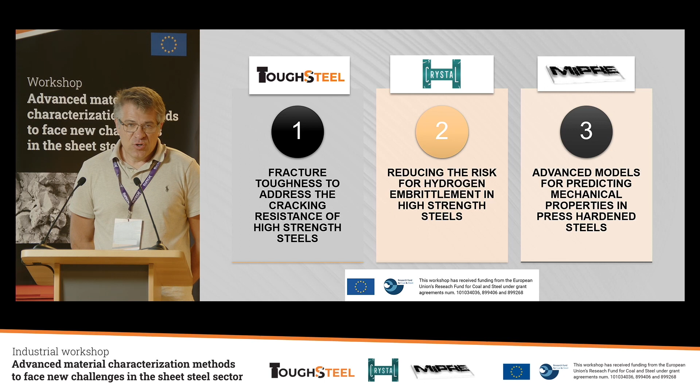Okay, these projects mainly address the mechanical performance of high-strength steels, because high-strength steels are the main materials applied in lightweight construction of vehicles currently, and it could be in the future. We see that high-strength steels are the perfect choice for lightweight because they combine outstanding properties with high levels of sustainability and affordability. And sustainability is a topic that we are all interested in today.

Just to mention that the CO2 footprint in steel production is one of the lowest in the materials for lightweight, and also steel has a lot of possibilities in recycling. So we're going to see in the coming years projects and results about development of newer steels with a higher degree of recycled material and of course lower impact in the footprint.

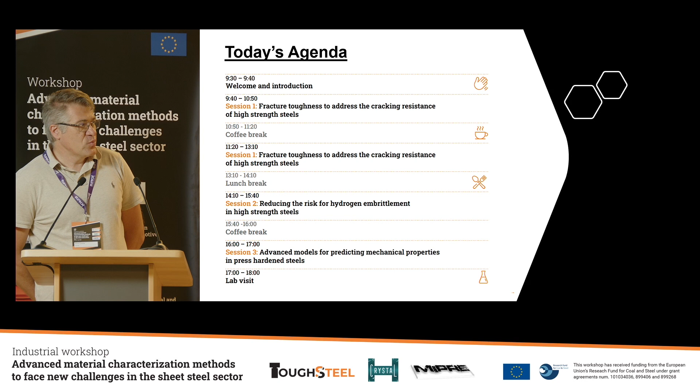So what we're going to see today, this is the agenda. We will start in the morning session with fracture toughness to address the cracking resistance of high-strength steel. This is the result of the ToughSteel project. In the afternoon, we have 2 sessions. The first one is the Crystal project results, about reducing the risk of hydrogen embrittlement in high-strength steels. And we close the session in the afternoon with the results of the MIPRE project about advanced models for predicting mechanical properties in press-hardened steels.

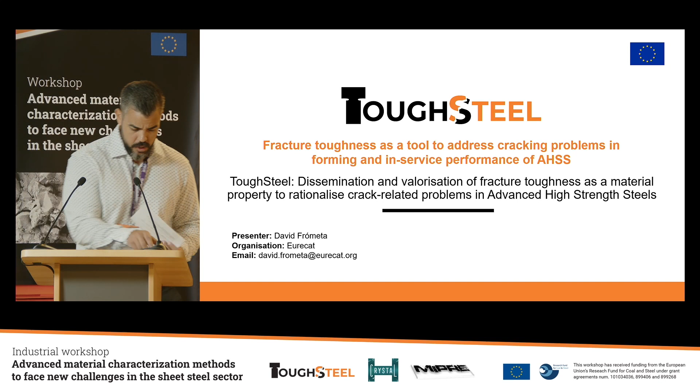So let me start by the beginning. This is the general overview of the project. ToughSteel is called Dissemination and Valorisation of Fracture Toughness as a Material Property to Rationalize Crack-Related Problems in Advanced High-Strength Steels.

The acronym, as you know, is ToughSteel. This is a European project funded under the frame of the Research Fund for Coal and Steel, the RFCS. As the title says, it is a dissemination project, so it's not a research project itself, but it consists of the dissemination of the results gathered or gained in different previous research works.

The project had a duration of 2 years, so it started the 1st of July of 2021, and it ends next Friday, the 30th of June. So they've been 2 exciting years of intensive work and a lot of dissemination events, workshops, webinars. So probably you have seen a lot of our activities all over these 2 years.

So some information about the consortium. It's formed by 8 partners. The project is coordinated by Eurecat. We also have the participation of 2 universities, the Catholic University of Louvain and the University of Technology in Luleå, also 3 steel associations, Jernkontoret from Sweden, UNESID from Spain, and Associazione Italiana di Metallurgia from Italy. Of course, the collaboration of CRF from the Stellantis group, and also the national Spanish standardization body, UNE.

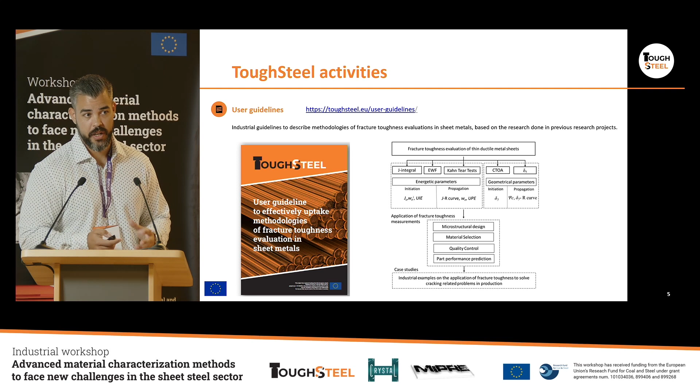Of course, as I said, this is a dissemination project, so the core activities were focused on dissemination. So we organized a lot of training webinars, academic and industrial workshops, with the idea to promote discussion and the engagement of both academia and industry. So I think in that sense, the project has been a complete success. An example is the representation that we have today here from the industry and the interest generated over these 2 years.

Regarding the training webinars, we have organized a total of 5 online training webinars dealing with different topics on how to apply these different fracture toughness concepts to understand different phenomena like forming, crashworthiness, material selection, etc. All the webinars were recorded and the videos are available on our website. So if you are interested in taking a deeper look, feel free to follow us on our website and you will find everything there.

Also, as I was saying, the different academic and industrial workshops, like the one that we are celebrating today. This is a kind of a special one because it's not only an industrial workshop, but we will also share the experience that we have in the open call that I will explain a little bit more in the next slides. And as a final result, we will also have by the end of the project 2 digital courses prepared by the University of Luleå, where the aim is to make all this information about fracture toughness more available.

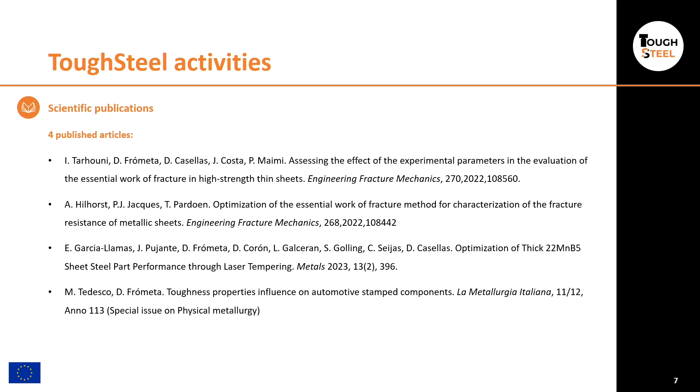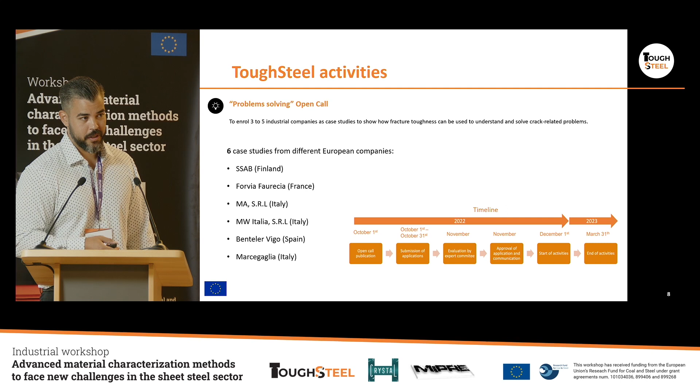From the applications, we selected a total of 6 case studies. Here are the ones that were awarded in this open call. We have SSAB, as I mentioned before, participating today here, Forvia, MA. Unfortunately for MA, we didn't have time to prepare a proper case study, but of course it's something that we will keep in mind for future collaboration with them. MW Italy, Benteler Vigo, and Marcegaglia. Marcegaglia was not available to come here today, but later Laura will share our experience with their case study.

Okay, regarding standardization activities, here we also have some important information to mention.

Apart from the previous CEN workshop agreement that we performed in previous projects, with the idea to standardize these new methodologies, or not new, but new when applying to high-strength metal sheets, we developed this test method for determination of the essential work of fracture of thin ductile metal sheets. And now in the frame of ToughSteel, we created, also of course with the collaboration of UNE, this CEN workshop, with the title Fracture Toughness Evaluation Methodologies Applied to Advanced High-Strength Steel Sheets. And in the frame of this workshop, we created these 2 documents, these 2 CEN workshop agreements.

The first one is related to the user guidelines that I showed in the previous slide. It is called Guidelines for the Evaluation of the Plane Stress Fracture Toughness of Advanced High-Strength Steel Sheets in the Frame of Fracture Mechanics. Again, as I mentioned before, it gives guidelines and recommendations about the different methodologies, the meaning of different parameters, how to apply them for these kinds of materials.

And the second one is the test method for the determination of a cracking resistance index for advanced high-strength steel sheets, which is also closely related to this essential work of fracture methodology. But now we were thinking here to provide something even simpler, a really simple test that can provide a first estimation of the cracking resistance of these high-strength steel materials. So here the idea was to provide some kind of index that helps also for material selection, for material screening in a very fast way.

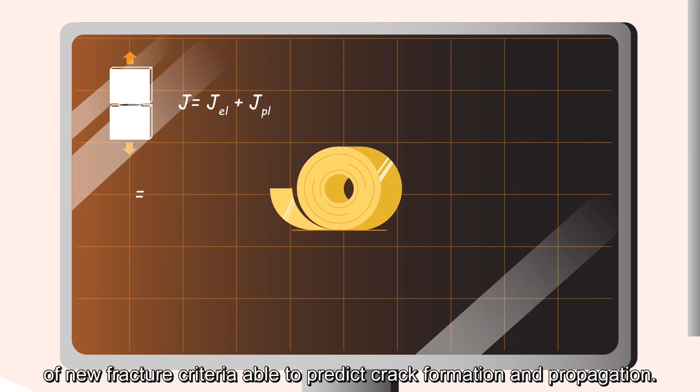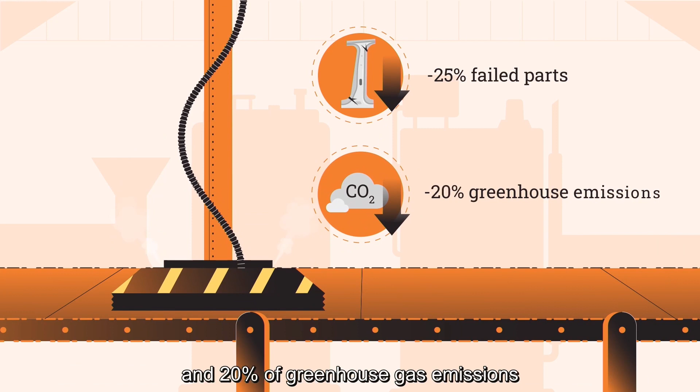Cracking during cold forming has become one of the greatest fears of high-strength sheet metal producers and part makers. This risk is even more accentuated with the emergence of new advanced high-strength steels, whose greater cracking susceptibility requires the development of new fracture criteria able to predict crack formation and propagation. Recent findings have shown that fracture toughness is a reliable property to assess edge cracking and crashworthiness in a simpler and faster way. ToughSteel aims to disseminate the industrial, economic and environmental benefits of measuring fracture toughness and boost the usage of this material property to understand crack-related problems. The project provides practical tools, including a user guideline for fracture toughness evaluation in thin sheets, along with an open access fracture toughness database, and other resources such as training webinars and industrial and academic workshops. Our main objective is to upskill the industrial community to optimize material selection, prevent production losses, and reduce the time to market of sheet metal products. We estimate that the implementation of these approaches will result in a reduction of up to 25% of scrap metal and failed parts, and 20% of greenhouse gas emissions due to the cuts to machinery usage time. Fracture toughness is key to increasing the competitiveness of the European metal industry. Learn how to measure it and optimize your business operations at toughsteel.eu.

Okay, well, I hope you liked the video we prepared for the project, and I hope you can see it also from home. And well, I think that was my first introductory part. I think it was a fast one. I think we are a little ahead in the schedule, but okay, I think we can move now to the important stuff.

And now I can introduce our first speaker of the session, which is Vili Kesti. Mr. Vili is a senior specialist in the Knowledge Service Center of SSAB Europe. Mr. Kesti's career has been focused on the research and development of new high-strength steel grades, along with providing technical support to SSAB customers for their specific forming processes. He has been an employee at SSAB since 2010 and holds a Master of Science in Mechanical Engineering with a major in Physical Metallurgy, and currently he is Senior Forming Specialist at SSAB Knowledge Service Center.

He will be presenting today the presentation with the title Blanking Behavior of Hot Rolled Steels, Correlation with Fracture Toughness Properties, which is also, as I mentioned, one of the case studies that we had in this ToughSteel Open Call. So please, Vili, the floor is yours.

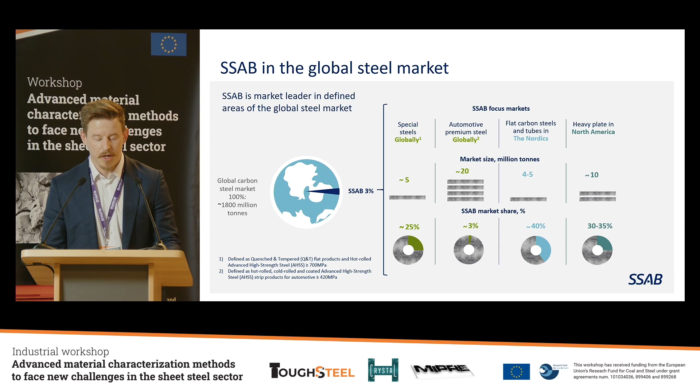But if we go into our focus areas, special steels, meaning quench and tempered hot rolled steel grades, we are actually a market leader in the world, with about 25% of market share there. We are growing also in the automotive industry, and we have a really strong position in our home markets in the Nordics and in the Americas. So we are a rather small company, but we are actually a leader when it comes to high-strength advanced steels, especially in hot-rolled grades.

And last but not least, we are aiming to be the first fossil-free steel company in the world, so really making a big change when it comes to producing steel. I'm not going into this in detail, it would most likely take the whole day. You can find more information on our website, and you will see some interesting pictures here and there in the presentation related to this topic.

But I think we should go into our case study. We selected 5 different hot-rolled materials in 3 millimeter thickness, and the idea was to select very similar strength levels for all the materials, but very different microstructures in order to make things really interesting.

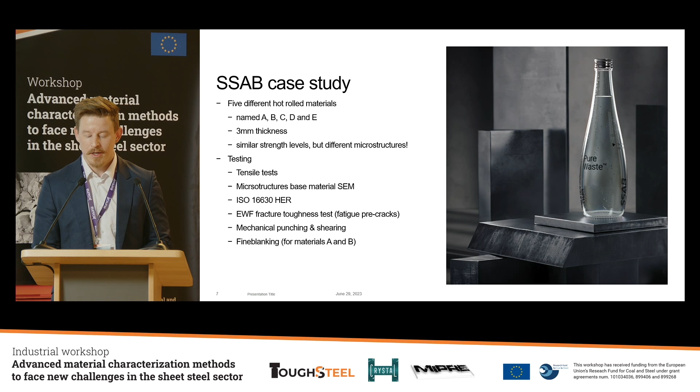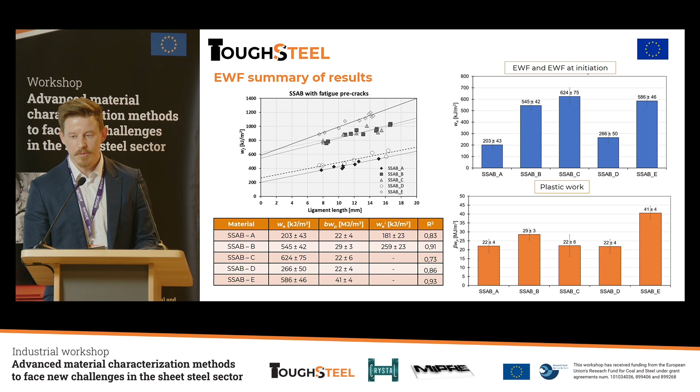And we could see also that when it comes to plastic work, there is only one material that is statistically different to the others, and that's the steel E. And now one interesting question is of course: what about the hole expansion ratio and essential work of fracture? Are we able to correlate these? Here you can see the results from these 5 materials.

And before going into this, I would like to bring Mr. Frómeta's previous published work, including much more results for different kinds of materials. And you have found a really nice correlation for the materials, essential work of fracture and hole expansion ratio. And now I took all these results from a previous publication, and you can see now the small dots in our figure on the left. And actually what we can see is that the old results and the new results are aligning really nicely. We can actually see the correlation there.

But the steel B is creating something that we don't understand, and that's the question mark there, what is going on. We have double checked, we have made more tests, and everything is as it's shown here. So meaning that that steel grade is creating much higher fracture toughness than we could expect from the hole expansion results. So there is something to further research and try to understand.

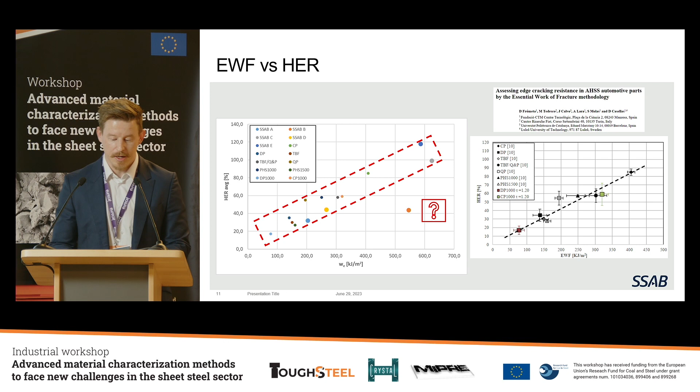And one thing that I want to highlight here is also, if you are looking at the fracture surfaces, now I'm using the laser only, most likely not visible in Teams, but steel A, we can see severe delamination, steel C, the same story, and steel E, quite a severe delamination. But it doesn't seem to affect fracture toughness or these true thickness strains, because steel A is on a really low level in both, but the other 2 delaminated are on a really high level of results. And again, something maybe we don't fully understand yet.

Then some results on punching, shearing, and fine blanking. We selected 2 materials, steel A and steel B. As you can see, really identical mechanical properties when it comes to strength, rather similar hole expansion ratios, but now we have 2 different levels of essential work of fracture.

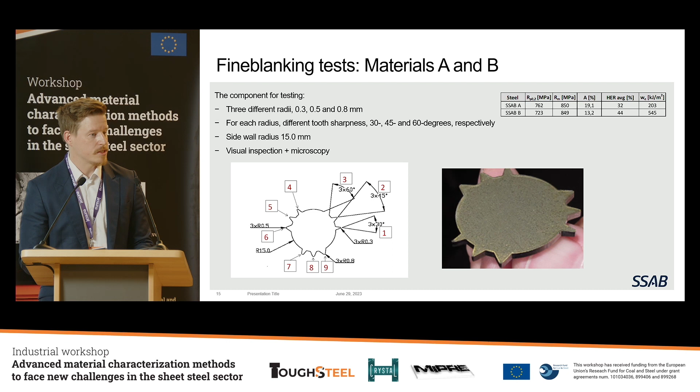Then fine blanking. This is a special design that we have, including different tooth radiuses, different cutting angles, and we are using zero cutting clearance in fine blanking, and we are monitoring whether we see any cracks or defects on the fine blanked cut surface. And again, the same steel grades, and maybe you can already guess the kind of results and story. Steel A is showing defects on these fine blanked surfaces. I wouldn't recommend this grade for fine blanking purposes, but steel B, we couldn't find any defects, even with the most challenging tooth radiuses. So it's absolutely perfect for this application. And again, the thing that is differentiating these materials is essential work of fracture.

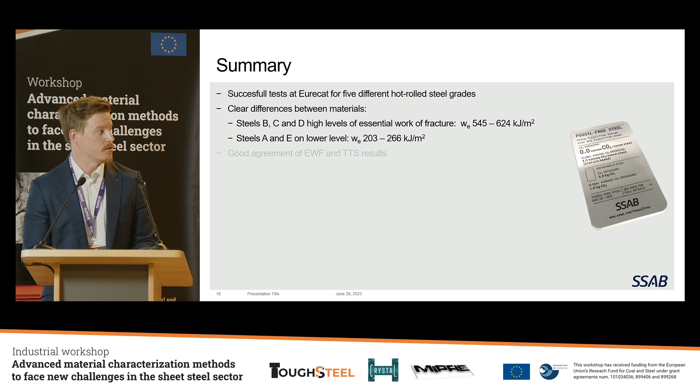Then I think we have time to summarize. We made successful tests for hot rolled grades now in 3 millimeter, also these fracture toughness tests. We could see really clear differences between these materials, two really different levels, and we could rank the materials according to these results. We could see that there is a really good agreement on essential work of fracture and the fracture surface strains, through thickness strains, a really good correlation there.

And we found out that the ferritic grades are showing delamination, but it's not actually affecting that much on these results because we have steel A on a low level and the other two are on a very high level with the delamination. And also we've tried, of course, the previously published correlation from Mr. Frómeta, that the hole expansion ratio and essential work of fracture are really correlating. And we could say that, yes, there is a correlation, but there is the one material that is behaving or not behaving. Let's say there is something going on, and we have to look at that more closely.

And there is also good agreement with these essential work of fracture results and our shearing and fine blanking results with the two materials. Most likely we have to look at more materials and see if this is universal truth. Personally, I think we have a lot of things and questions open when it comes to the effect of microstructure on these essential work of fracture results, how different microstructures are affecting the results. We don't understand everything yet there.

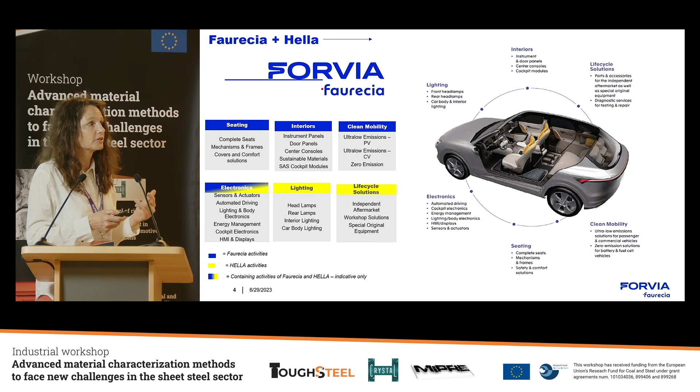So quickly, the new group, resulting from a merging last year with the German HELLA. In fact, we have the seating. I belong to the seating. I'm located in France. We have the interior system, the clean mobility, the electronics, also the lighting coming from HELLA, and the life cycle solution. In fact, in that, we have also electronic monitoring for the future of autonomous driving and also artificial intelligence for the environment recognition.

So quickly, we have 6 business groups, 150,000 people worldwide, in China, in North America, in Europe. Although Europe is 30% of our activities. So we are at the 7th place in the ranking of automotive suppliers. And just quickly, we were also the first to launch net zero by 2045. It's really important, and we have signed a contract with SSAB to provide green steel at the horizon of 2025-26.

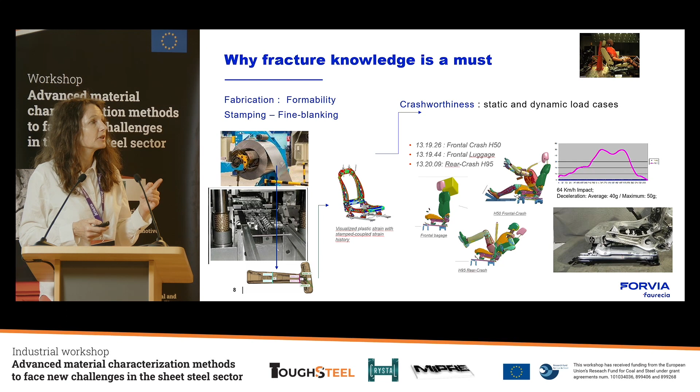So the context of fracture development, why fracture knowledge is a must. First, there is the formability, in stamping, fine blanking. And so we have this type of part. It's a component for the seat. And assembled on the seat, we have to predict the crashworthiness behavior. And there are very high levels of acceleration. So the presentation of our case. No, sorry. Yes. The context of fracture development. Yes, formability, fine blanking, the crashworthiness. Sorry, I'm going back on the road.

So, also this is an example of modeling with different plastic criteria. We have different tools, in fact. Some are very well known, like Autoform or LS-Dyna, Hypermesh. And we are based mainly, for the forming limit, on the forming limit curve to predict the final behavior of our parts.

But that's not enough. That's why we have, for instance, different production centers. One is a supplier production center in Portugal called Bamesa. They are purchasing some batches around Europe, and there are some cases where 20% of the production is affected by those cracks without knowing why.

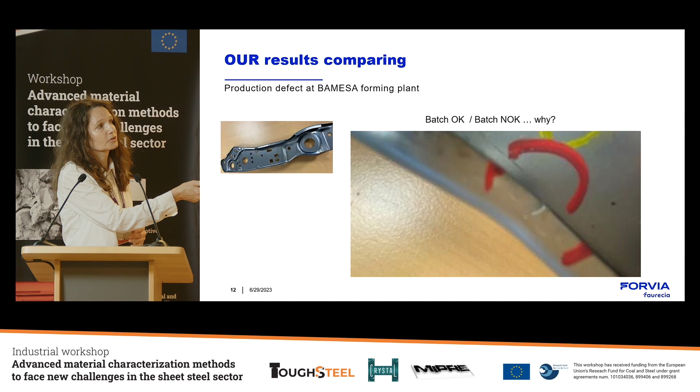Because when we investigate the material certificate, all is the same. In fact, we have the certificate for the cracked material and for the material which doesn't lead to cracks. And regarding chemical composition and mechanical characteristics, it's the same. And even with the examination of the microstructure, it's quite impossible to predict that one material would lead to cracks and the other no cracks.

So that's the importance of having another means to investigate the behavior of material, and the essential work of fracture was the great opportunity to do it: separate the materials regarding the essential work of fracture results. And it's really significant for us. And this has been introduced to the simulation groups inside Forvia, in Germany, in France, and so on.

Because currently we are only examining the global formability. We are launching a lot of tensile tests. We have the many properties for the different batches, of course the elongation, and so on. But regarding the local formability, and this is the example of this,

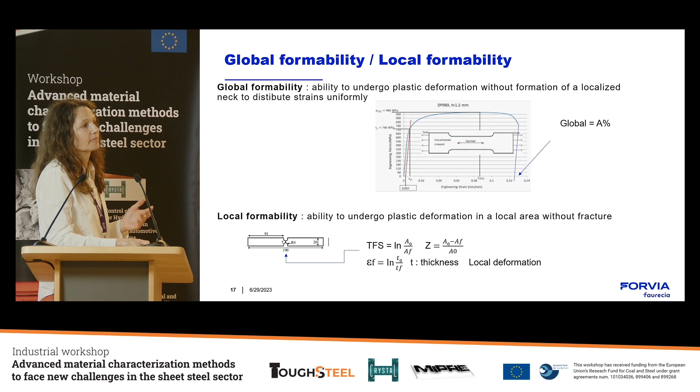Yes, and so the local formability can only be investigated by such testing samples. And it's really an important result to get the stress under local concentration. Currently, for the forming limit curve, there are some studies that have already been launched. For instance, there are articles from Daimler that show the minimum of the forming limit curve here just gives a correlation with the global formability.

It's important for deep drawing, but for fine blanking, and of course if you are doing a hole, it's not correlated. That's why we have this hole expansion ratio currently in-house. It gives important and also consistent data regarding this behavior, but it's not easy to set up this type of test, because there is dependence on the machining of the hole, and you have a result which is not really material intrinsic.

So even if David et al., Frómeta, show that there is a good correlation between hole expansion ratio and the essential work of fracture, I think there is something more, because this is a graph also coming from Daimler that shows the large scattering of the hole expansion ratio. And also, in Germany, we have different contacts with the material supplier. There is a trend to drop this methodology because it's not consistent enough for advanced high-strength steel, where we are looking for accurate results.

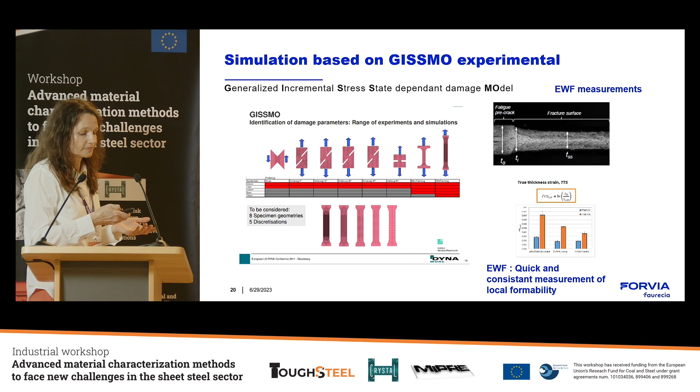And so my conclusion is to say the essential work of fracture method may replace the hole expansion ratio test for its accuracy and simplicity to set up, for the prediction of cracks during forming or crash. And we will be able to sort advanced high-strength steel according to their cutting-edge sensitivity. That means the material lab could also have this type of test in their daily tasks, because we have a quick, experimental and consistent value for built-in simulation models. So that's my presentation of my opinion regarding the methodology and our experience in Forvia.

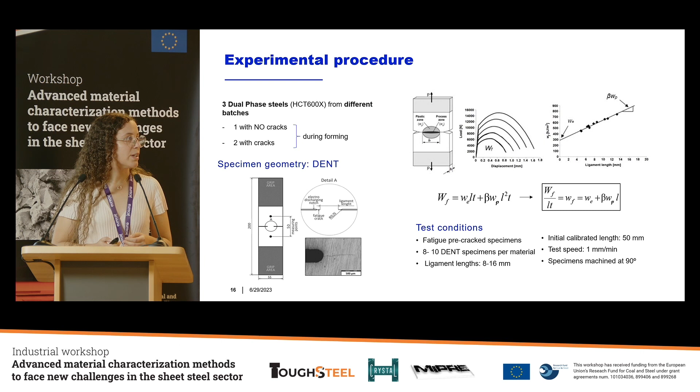Here we can see the test conditions we used to perform the test: we used fatigue pre-cracked specimens, about 10 specimens for each material, and ligament lengths from 8 to 16 millimeters. Okay. Next, we can see the results that we got from these 3 materials that we tested.

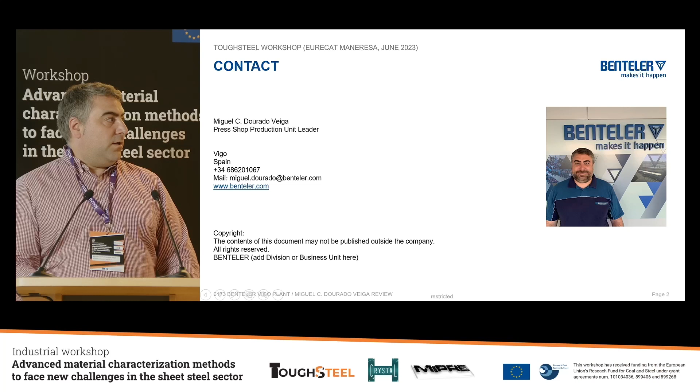Well, Benteler in 84 words. Benteler develops solutions that make the difference for our customers, employees, and society. We are passionate about producing safety-relevant products, services, and systems for the energy, automotive, and engineering sectors that lead to success. And we do that in close proximity and collaboration with our customers. With our technological expertise and strong focus on successful implementation, we keep our promises. At Benteler, we give our all with courage, ambition, and respect, but we never give up. Benteler, the family of driving professionals since 1876.

This is my plant, Vigo plant. Well, there are only 26,000 square meters. Maybe for many of you this could be a large surface, but believe me, for us it's only a few square meters. We are approximately 430 employees. Our main products are chassis products, 59% of share, structural products, hot forming parts, IP support, bumper, 40%, and only 1% cold stamping products for chassis and structure.

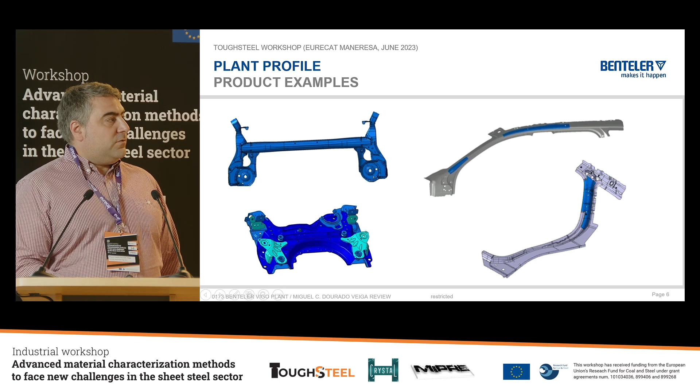Okay, these are some examples: rear axle, pillars. Our customers: the main customer for Vigo is Stellantis, 70%. Also, we supply parts for VW, 11%, for Ford, 10%, Volvo, 9%. And as you can see, from Vigo we have a logistics problem because we have to send the parts quite far. So we have to fight with the cost, with the logistics team, to have more share in the market.

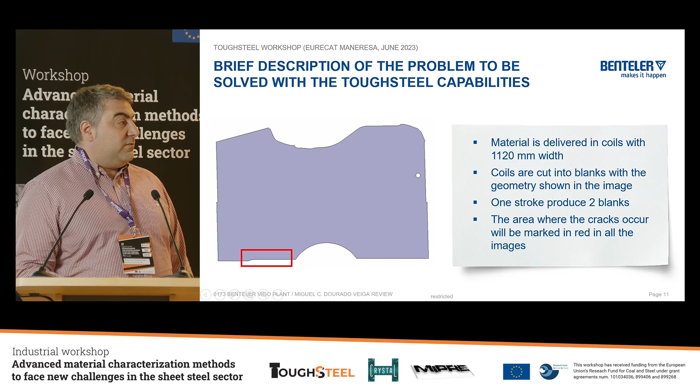The material is delivered in coils with 1,120 millimeters width. Coils are cut into blanks with the geometry shown in the image. One stroke produces 2 blanks, and the area where the crack occurs will be marked in red in all the images. Blanks are stored maximum for 2 days before stamping. As I said, we have 2 processes. First, we cut the blanks from the coil, and after that, we stamp them in another press. Blanks are stamped in a transfer tool, and one stroke produces 1 part in the stamping process.

The cracks always appear in the same area and operation of the stamping process. The length and number of cracks per coil varies for no apparent reason, and several tests have been performed to double-check properties of the material, I mean our requested tolerances, but nothing out of the ordinary has been found.

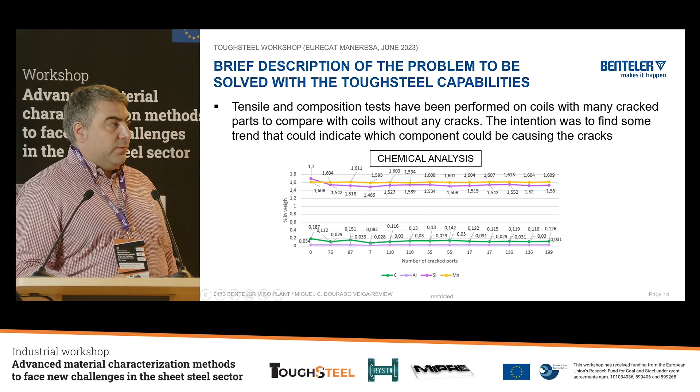And also, we had to smooth the radius in the critical area, because a smoother radius reduces the stress and tension in the critical area. Obviously, we can't go to any kind of radius because the quality of the customer puts the limits here. Okay.

Our targets to achieve with the ToughSteel open call: to find the root cause of random cracks. We don't know if the problem is the material specifications, the aging of the material, or other. To improve the quality status of this part, of course, to reduce the euros of scrap cost, and, if possible, transversalize possible solutions to other products.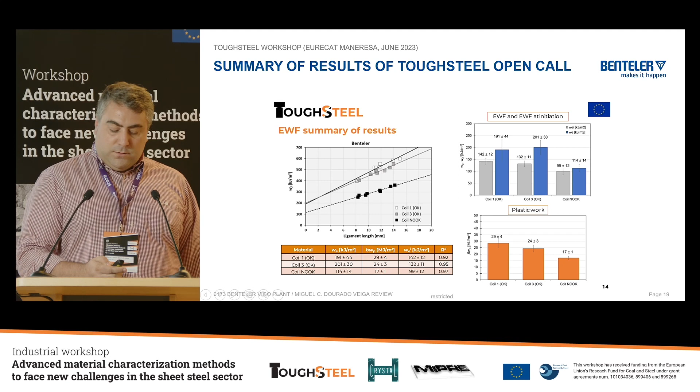Conclusions. The study has shown that a coil with a high rate of cracks has very different mechanical properties than a coil that doesn't generate defects. In this case, the test which has been performed to double-check properties of the material requested tolerance has also shown differences with the certificate attached to the coil.

And unfortunately for me, we still don't know what's the root cause of the high number of cracks. I don't know if the problem is the chemical components or loss of properties due to aging or other possible causes. And that's all.

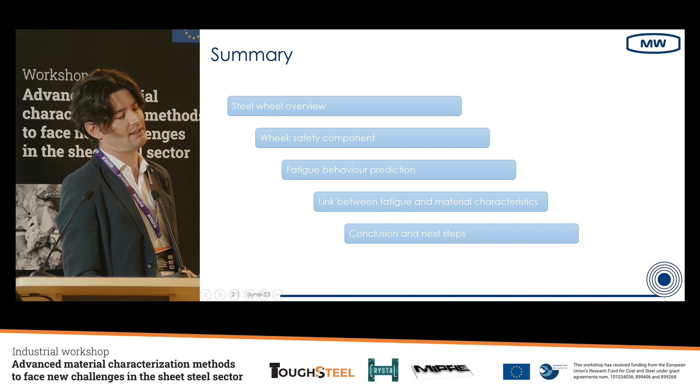Starting from a really fast summary of what we will see in this presentation, we will have an overview of the steel wheel and a focus on the fact that the steel wheel is a safety component, and consequently we need to predict the fatigue behavior. Then the activities we did with David and the team about the link between fatigue and material characteristics, and then the conclusion. Okay, the steel wheel overview. So there are several types of wheel with different material and different technology.

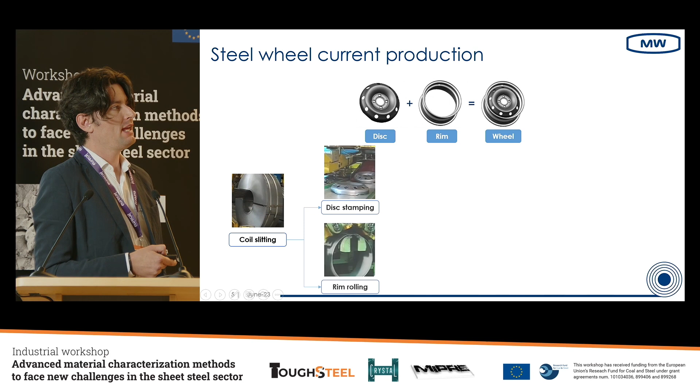Okay, how is the steel wheel produced? The steel wheel is composed of two components: the disc, this is the central part, and the rim. Both are done starting from the coil. From the coil, we cut the blank. And then the disc is done by a stamping process, and the rim is done by a rolling process. Then the disc and the rim are fit together, assembled and welded. After there is the painting, the quality control, and then the packaging and shipment.

Okay, the wheel is a safety component. The wheel is a mature component. Together with fire, it is one of the first inventions of man. The geometry and the technology are already established, and as I said before, it is a safety component. For that reason, it's difficult to innovate. It's difficult to improve this type of product, because it's already strongly optimized.

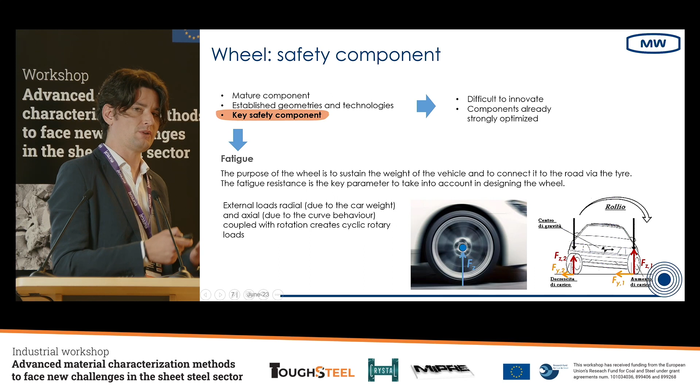Considering that the wheel is a safety component, the main aspect for the dimensioning of the wheel is the fatigue, because the wheel has to sustain the weight of the car, and there are several forces that play on the wheel. There are the radial forces coming from the ground, there are the lateral forces when we take the corner, the pressure, and so on. For that reason, there are different tests for fatigue.

The main two are the bending test, the rotary bending test, in which we fix the wheel in a special machine with an arm. This arm goes in rotation and applies to the wheel a bending moment. This test stresses more the disc, so the central part. And the two parameters for the test are the bending moment itself and the number of cycles that the wheel should reach.

The second test is the rim rolling test, in which we put the tire on the wheel, and we push the wheel against the drum and go in rotation. In the test, we can apply only radial forces, or if we introduce a relative angle between the axis of the wheel and the axis of the drum, we can also introduce axial forces in order to simulate the behavior of the wheel in the corner. Then also in this case, we have the pressure, because we have the tire, and the number of cycles.

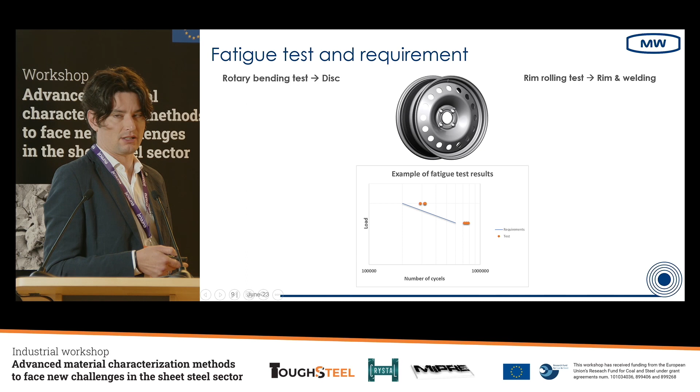In this graph, there is an example of what is required by the customer. Usually the customer requires 1 or 2 levels of loads. Here it is loads, generically, but it can be bending moment in Newton meters or radial forces in Newtons, and gives a minimum number of cycles to respect. The test is okay when the wheel exceeds this minimum number of cycles. Here there is an example of the crack after the test on the disc with the dye penetrant. And this is an example of the crack on the rim after the rim rolling test.

So, for that reason, the wheel, which is composed of 2 different components, has different needs. For example, the material for the disc should have high performance on fatigue, high cold formability or stampability, and typically the material that we use for the disc is DP600 grade, with a range of thickness between 2.8 to 6.4 millimeters.

Regarding the rim, it should have a high performance on fatigue, high weldability, high cold rollability, and in this case the grades are low alloy steel from S235J2 to S460MC. And the thickness range is lower than the disc, between 1.10 to 4 millimeters. It depends on the load, the type of vehicle, and so on.

So, considering that fatigue is the main aspect for the steel wheel, and considering that this type of product is not suitable for fast prototyping, because when we create the tooling to produce the wheel it should be definitive, we need to predict the fatigue behavior at the beginning of the wheel. And we have several

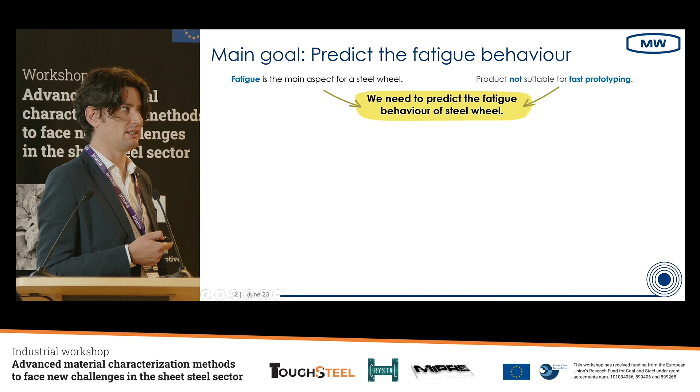instruments for the prediction. The first, for sure, is the FEM simulation, which is mainly used in the phase of optimizing the RFQ phases. The pro is that it's very fast and reliable. The contra is that, considering that the FEM is correlated to experimental data, if we don't have experimental data, for example a new material or a new process, this correlation is less reliable.

For that reason, we have this type of test. This is the second instrument. It is a test on a specimen, in which, bending the flat specimen into the bent specimen, we can introduce the hardening phenomena during the stamping, and we can convert the pure traction and compression forces into bending forces, similar to what happens in the bending test.

The pro is that the test on specimen is well representative of the test on the wheel, and does not require the wheel manufacturing, so we can do it before creating the wheel. The contra is that this type of test has only one failure mode, always the same, in the same position, and is dedicated to the material, not to the entire component that is composed of 2 different components with the welding

Then this, the test on specimen, is the test that we did in the Fatigue4Light project, which had the scope to reduce the weight of the car by 15%. So in that case, we tested a new material. As I said before, the material for the disc usually is DP600. We tried to go to a complex phase CP800 with the scope to reduce the thickness and consequently the

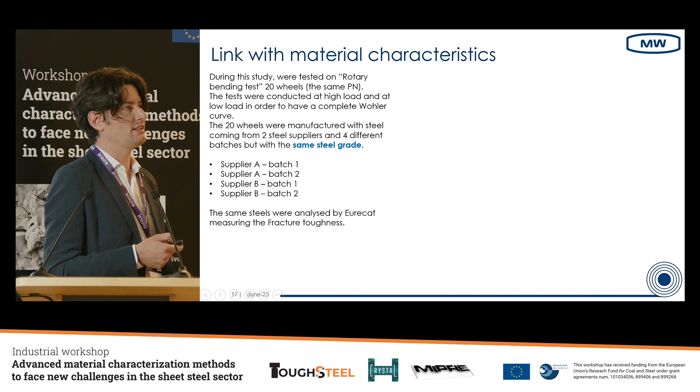The disc is done in DP600. We identified 2 different steel suppliers and 2 batches for each supplier. So in total, we have 4 different types of the same wheel. We produced the wheel with these 4 types of steel, and we sent the blanks to Eurecat. MW did the fatigue tests, and Eurecat analyzed the fracture toughness.

Okay, these are the fatigue results. As is visible, there is a difference between the 4 samples, especially between steel supplier A and steel supplier B. There is not much difference between the 2 different batches. But these discs are done with the same material grade.

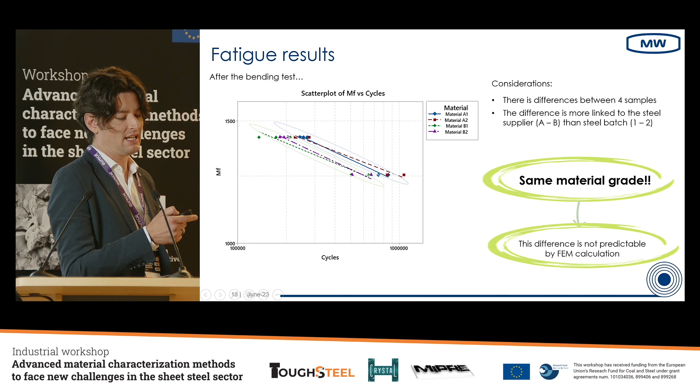And this is a problem because, for the simulation, this is not predictable. We have just the same material data for the same material grade in the simulation, but we see that there is a difference.

So here we have just the focus on high load and low load, and the two levels are visible. Material A is much better than material B, the same. So what can be the reason for this difference? We made a sort of Ishikawa analysis, and we asked some questions.

Can it be a different process? No, because the wheels are made at the same time, in the same press, in the same batch. Different failure mode? No, also in this case we analyzed all the wheels tested and they all have the same failure mode. Different test conditions? No, because the operator is the same, the test conditions are exactly the same, on the same bending machine with the new screw and so on, so the tests are really identical.

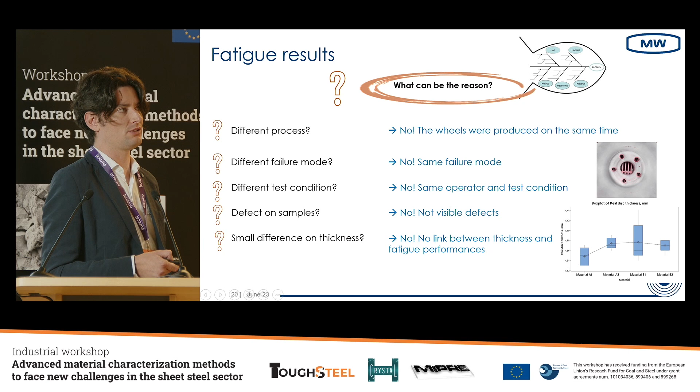Some possible defect on samples? We checked the samples and we didn't see any visible defects. A small difference of thickness? The coil sometimes has some tolerance in the thickness. We analyzed the thickness, and there is a difference, but it does not explain the difference in fatigue, because if you remember, material A was better than material B, but in that case the thickness is not. It doesn't explain this behavior. So different material characteristics. Okay, probably this is the answer.

Then we also analyzed other characteristics coming from the material certificate, like yield stress, UTS, the ratio between yield stress and UTS, and the elongation. And there is also in this case quite a good correlation with the elongation, and there is also a small correlation in this ratio, except for material A2. So it can be interesting to extend this study to other parameters and other case studies.

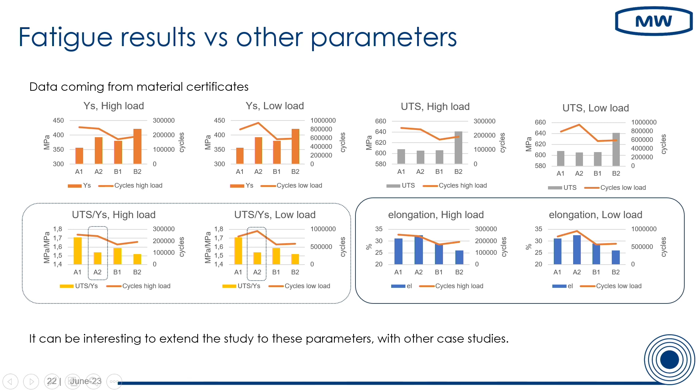So concluding, we observed a significant difference between two different steel suppliers with the same material grade. The difference is mostly due to the steel characteristics. And this difference is not predictable by FEM simulation if we consider it as the same steel grade. And we found quite a good correlation between the essential work of fracture at initiation and the fatigue. The analysis of these characteristics can be an instrument that can help to predict the behavior in fatigue.

We would like to extend the study to other failure modes, other cases, like, for example, the crack starting from the ventilation hole. This can be really interesting to compare with the essential work of fracture. And it can also be interesting to include in this analysis other parameters like yield stress, UTS, and elongation.

Thank you, David, for the introduction. Today we will present another approach: how we can use the fracture toughness values, instead of predicting edge cracking, to predict the fatigue behavior of materials with some defects. As you probably know, the main tendency in the automotive industry is to move from internal combustion engines to electric vehicles.

So this change of platform results in an increase of weight of the vehicle in about 12 or 15% of the vehicle. So if we want to maintain the original weight of the vehicle and reduce this weight of the electric vehicle, what we can do is reduce the weight of the chassis of the vehicle. Okay, so by reducing the weight of these different components in about 24 to 30%, we can reduce and maintain the original weight of the vehicle.

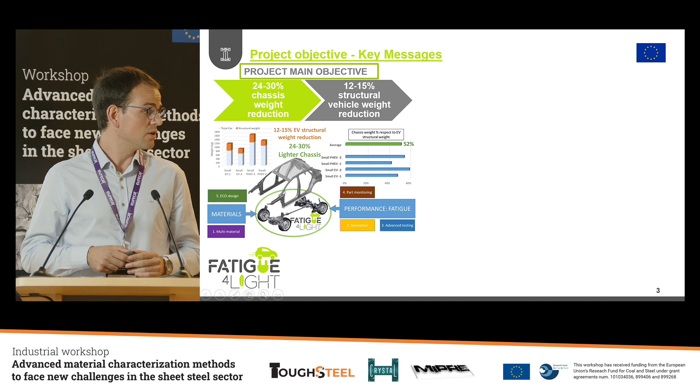In fact, this is the aim of the Fatigue4Light project, where we are developing new techniques and also using new materials to reduce this weight of the vehicle. In this case, we are considering, as I mentioned, different materials from advanced high-strength steels, stainless steels, aluminum alloys, hybrid materials. So we are considering almost all the industrial materials, let's say, to reduce the weight of the vehicle, but also considering the affordability and sustainability of these materials, which is an important part in the design of these components.

So this is a project carried out by 13 partners, where we have research centers, academics, and also part producers, so the final producers, and steel making and also material making partners to achieve this aim.

But when we are talking about chassis components, we have to address different properties. So here you can see two different chassis components, a lower control arm, and also the chassis of the heavy-duty vehicle. And if we want to reduce the weight of these components, we need materials with good fatigue properties, but also with a good formability. Since we are decreasing the thickness of the material, we have to maintain the stiffness of the component. So this stiffness reduction can be compensated by slightly changing the shape of the component. So we need a good formability.

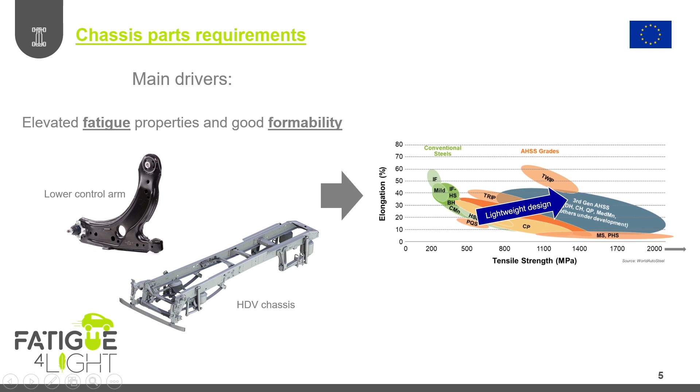So here, the banana plot, if we want to improve this behavior, we can move to a material with a higher tensile strength and with better elongation as well to achieve this lightweight design. But if we move to a material with a higher tensile strength, in theory, with a good material without defects, so a perfect material, let's say, we will increase also the fatigue resistance of the material, so we can reduce the thickness of the material that we are using.

But when we are addressing these different applications where we have trimming operations, serrated edges, or perhaps some coatings like in press hardening materials, we're introducing some defects in the material. Such defects can reduce and limit the fatigue resistance of the material. Then it's not that clear that the lightweight design can be addressed by only using a material with a higher tensile strength.

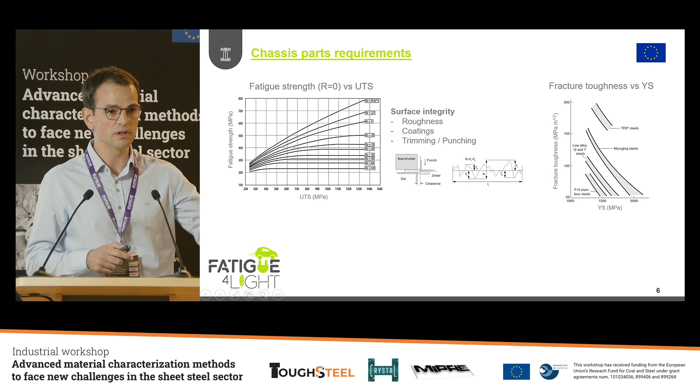Additionally, if you look at the fracture toughness evolution by increasing the tensile strength, we see that in the conventional materials, if we increase the tensile strength, the fracture toughness is reduced, but not for all the materials. So, for instance, for a given yield strength, we can move to another material with another microstructure to maintain this fracture toughness or even improve it. So the aim is to use these two different properties, fracture toughness and fatigue, and see how we can use mainly the fracture toughness properties to assess the fatigue resistance when we have a defect in the component.

So in the Fatigue4Light project, we addressed this point by testing 3 different materials, a DP and 2 CP grades. And the main idea is to cover a wide range of mechanical properties with different tensile strength and also different microstructures to see how we can achieve this lightweight design.

In this case, we evaluated the fatigue resistance of the material by testing two different conditions. On one side, we have these hourglass specimens with a polished edge. So this is the perfect condition, let's say, without defects, and can be considered unnotched specimens. And on the other side, we have these trimmed specimens, where we have the defect here in the edge, and we can consider them as notched.

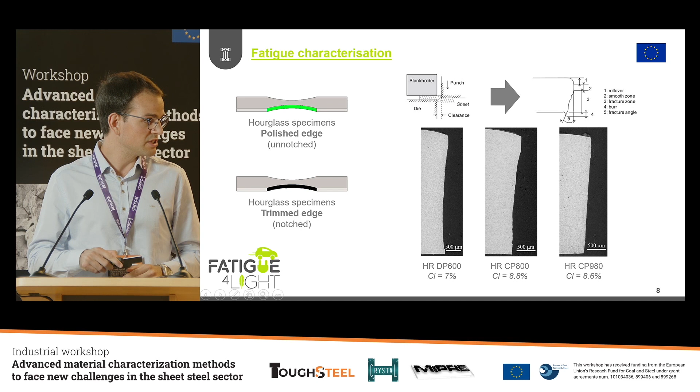So the trimmed specimens were obtained by simply shearing the material, and we obtained the well-known sheared edge morphology, where we have this plastic deformation, but also these small defects that we are introducing due to the fracture of the material in these operations. We trimmed the materials with almost the same clearance, and we tested the fatigue behavior of these materials. We used a rapid fatigue method that we developed in the Fatigue4Light project. This method is based on seeing how the fatigue damage is evolving during the fatigue test, where we are increasing the stress amplitude between these different fatigue blocks.

And by using this data, we can rapidly assess the fatigue limit of the material and have an idea of what's happening or which will be the effect of these different defects in the fatigue resistance. In this case, we are always focusing on this incipient fatigue damage, in this continuum damage mechanics regime, and we are just skipping the part of fracture mechanics when we have a large crack and the crack is only propagating.

So we also evaluated the fracture toughness by using the essential work of fracture. As has been explained, we can obtain the energy required to initiate the crack, but also the energy required to initiate and propagate this crack. And if we analyze the data that we obtain, the fatigue results from the rapid method, we can clearly see a difference.

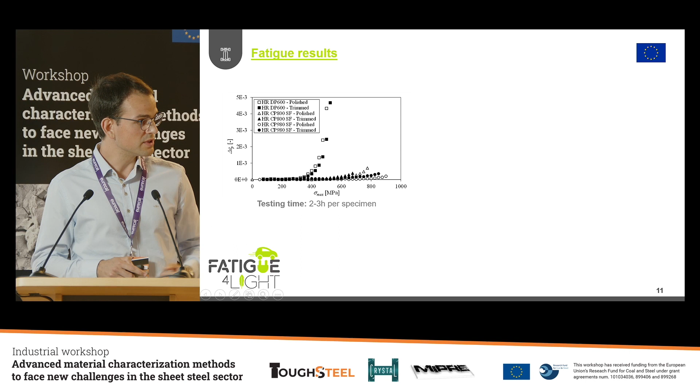In this case, you can see the plastic strain. So this is the damage, let's say, that we have in the material and how it's evolving throughout the test. So it is the plastic strain plotted against the maximum stress amplitude for each fatigue block. And here, by analyzing this data and using the points that belong to this microcrack initiation and also microcrack propagation, we can easily determine the fatigue limit of the material with the different conditions.

But when we have a defect, this behavior is completely different. And for some materials, we have some fatigue reduction. So for instance, for the DP600, the fatigue resistance is almost maintained, but for the other materials, it's reduced, for the CP. So such fatigue reduction can be quantified by using this fatigue strength reduction factor. That is simply the relation between the fatigue resistance of the trimmed specimens against the polished ones. And this fatigue strength reduction factor is related to the damage tolerance of the material.

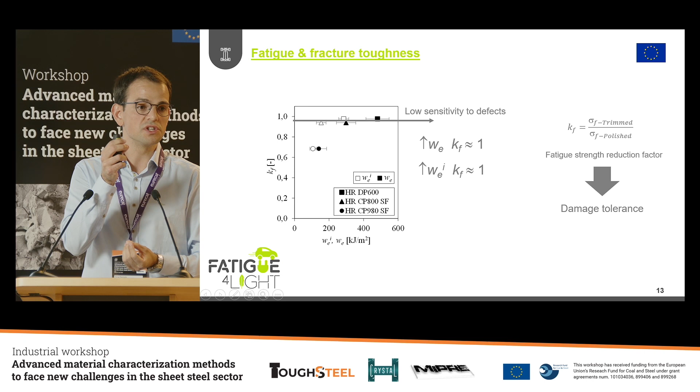But why can we relate these two properties, this fatigue behavior and the fracture toughness behavior? Well, here you have a defect that we can find in the trimmed edge. And the main point is that if we analyze the dimension of the cyclic plastic zone at the tip of this defect, which can be considered as a crack, this plastic zone is quite large, so it is really relevant compared to the dimension of the crack. So for these materials, we can say that the small scale yielding conditions are not fulfilled.

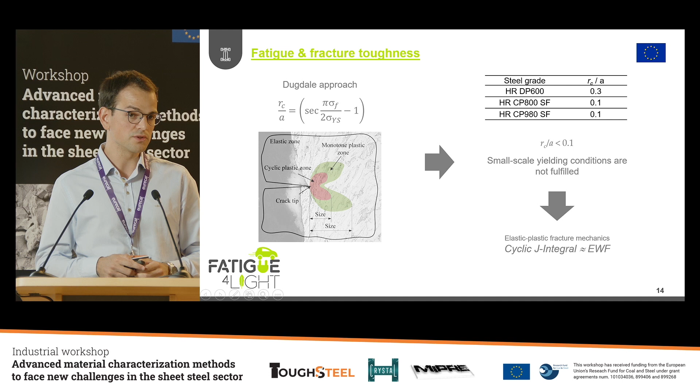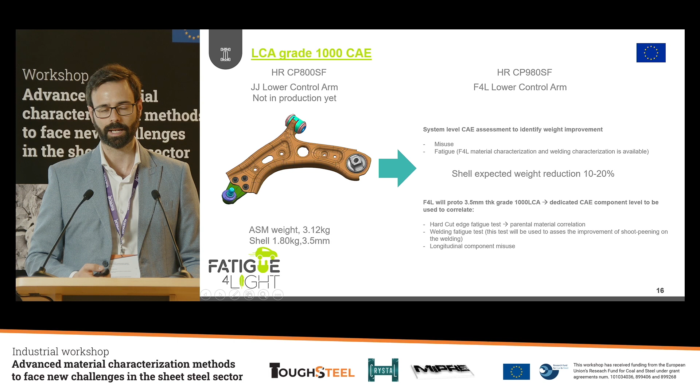And after we moved to the innovative material, the CP980, we performed also in this case the simulation on the free edges, and we highlighted in the diagram and in the component where we have the critical area that we have to pay attention to during the bench test. We have also modified a little bit the welding characterization in order to enhance as much as possible the fatigue performance of this area. Also in this case, the solution with the CP980 seems to work.

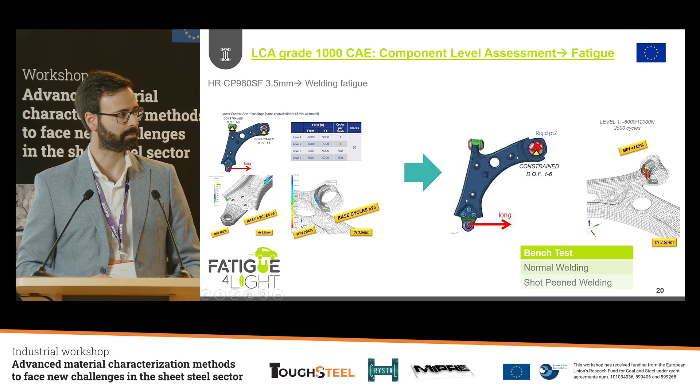And finally, the misuse, for which we put in correlation the system results, so the component with the surrounding components assembled together, and also the test on the spare part. This because, as you can see, the behavior that we have in the real car and in the bench is different. So we have to find a way to correlate these two behaviors.

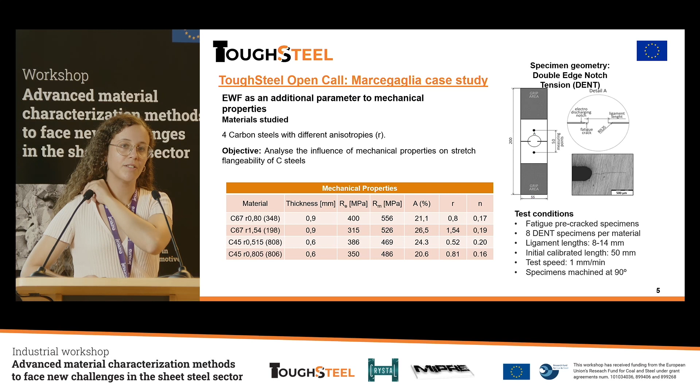In this case, we have 2 groups of materials, one C67 and the other C45, with different anisotropy values. And we performed the test, as we explained before, with the essential work of fracture method, with double edge notch tension specimens, and we got the fracture values as we have done for the previous results.

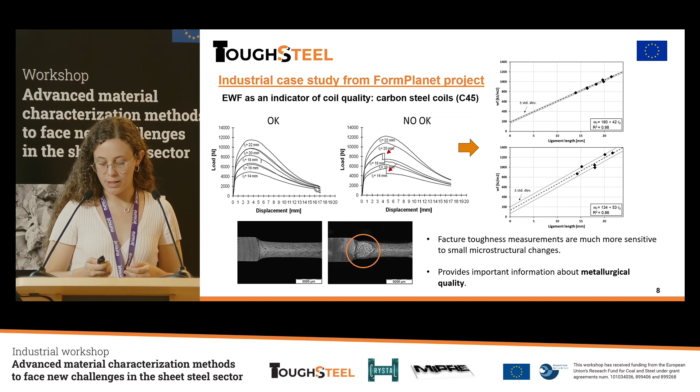And this is usually done with the crash boxes, either in the front of the car to absorb the energy when you crash into something, or to protect the passenger cage from intrusion when you're hit from the side, for example. So how do we quantify crashworthiness? I will focus on the actual compression part of the crash boxes here, and not the side impact. When quantifying crashworthiness in these cases, you can use a crash index.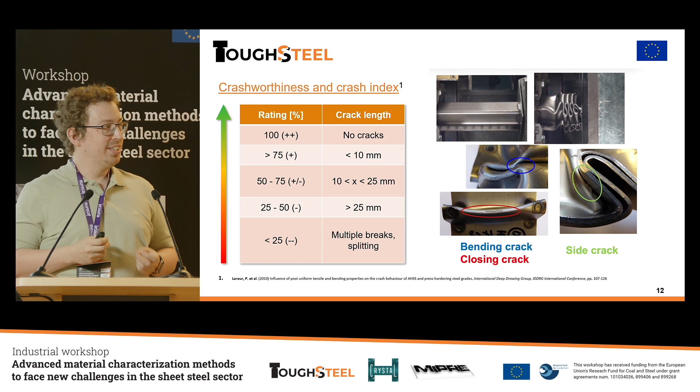And of course, a problem with this is that generally you spot weld these crash boxes to get it stable for the folding, as you can see here. And when you're evaluating crashworthiness of a material, you're generally just interested in the bulk material. When you spot weld it like this, you have classic initiation sites for cracks, and it usually starts in these spot welds. So that's a problem with this method.

So basically we decided to investigate this with a third generation TRIP-aided bainitic ferrite steel grade with an ultimate tensile strength of 1180 megapascals. The sheet thickness is 1.4 millimeters here. And I found the essential work of fracture value from Frómeta's paper here, 104 kilojoules per square meter.

And also we had a hot stamping steel. It's a boron steel grade with an ultimate tensile strength of 1000 megapascals. I found this from our Horizon project, the Form Planet project, and we found the essential work of fracture of 186. So as you remember from the last slide, before doing any experiments at all, we should expect the right one, the hot stamped steel, to perform better when it comes to crashworthiness than the left one, because we have a higher essential work of fracture value there.

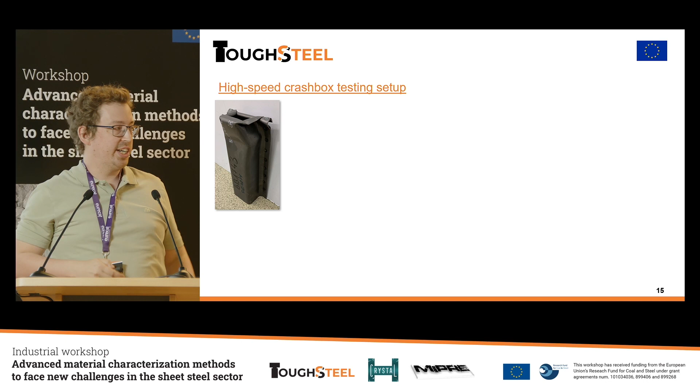Usually you use drop towers to perform this with a huge weight, and you drop it from a high level and crush the boxes like that. We don't have that, and usually you have maybe 5 to 10 crash boxes to get a good slope of the evolution of the crash index. We didn't have that either. We had 3 of every box. So we started to be a little bit creative.

We speckled it and used the stereo high-speed cameras. So you can see I have Phantom V1610 and 2512, and tried to do a stereo DIC measurement to capture the whole deformation from start to finish, and try to identify when the cracking happens and how to measure it. And instead of a drop tower, we had an Instron very high-speed machine. It's a hydraulic loading machine, and we use this for tensile testing a lot, for characterizing materials at high strain rates. But we can also use it in compression, which we did here, and it's able to reach speeds of 20 meters per second.

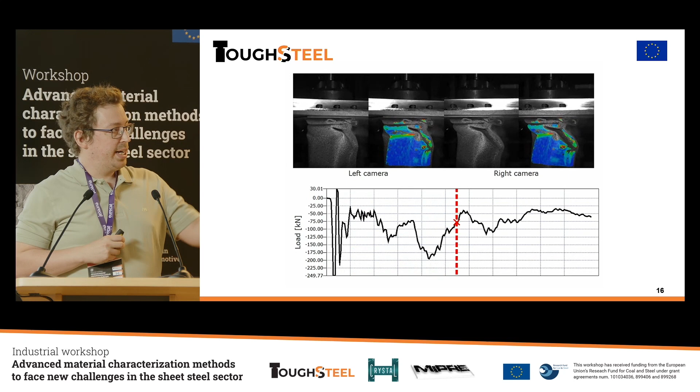So doing this, you can of course capture video and identify when cracks happen, or when spot welds fracture. We're generally not interested in spot weld fractures because we can't really trust the material in those spots. And of course we have the intrusion depths and the loading histories here. And also we have some strain field here because we want to validate this with a finite element model. I won't show that simulation here, but we wanted to do that as well. So we tried to get the facet field of that as well, so we can identify the cracks when they initiate and how they propagate in the end.

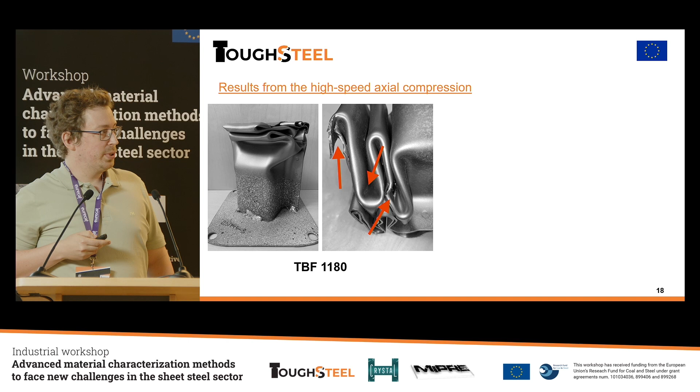So by doing this, of course, we get the usual information. You get the force intrusion, force crush curves, and we can integrate them to get the energy absorption as a function of the crush depth. And as you can see for the TBF material here, we have quite scattered values and quite consistent values for the hot stamping crash boxes. And how come it is like this? Well, cracking, right? For the TBF material, we could see quite severe cracking in some areas. And for the hot stamping steel, a lot less cracking.

And we could have seen this from the beginning because we saw the essential work of fracture values, right? It was higher for the right material than the left material. So we could expect less cracking and better crash resistance, and we can see that here. A lot of the cracking for the hot stamping steel was under the folds, hiding in the folds. So it was much harder to see with the cameras. So we had to be a little bit creative to backtrack from the final deformation and see when we had blowouts and stuff to measure or estimate the cracks.

It's a rough estimation. But basically what we received is the crash index decreasing rate here. It was easier for the TBF material because we could see the cracks and measure them pretty well. And we can see that the crash index decreasing rate was a little bit higher than for the hot stamping grade. I know the linear fit here is a stretch, but it was the best we could do. But the trend is clear. We can see, as we could expect from the essential work of fracture values, that the crash resistance is better for the right one, the hot stamping steel.

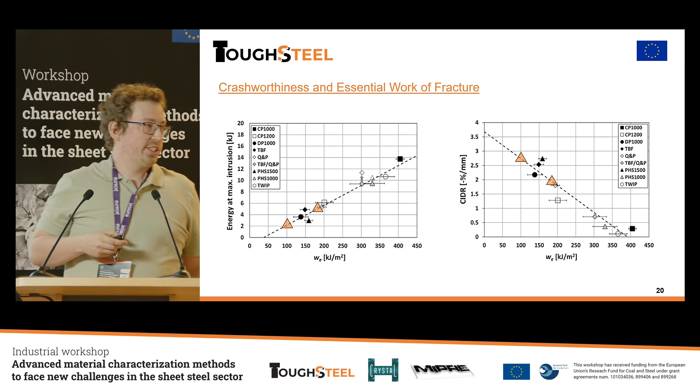And yeah, it correlates well with the essential work of fracture. So just for curiosity, I put in the published result from Frómeta here. And if we put in the essential work of fracture values here, this is what we could expect from this graph. But of course, we received different values, a lot higher energy absorption and lower crash index decreasing rate.

So what's going on? Is it flawed? Well, hardly, right? There's an explanation for it. First of all, identifying the crash index or crash resistance using crash boxes is highly geometry dependent. And the ones they used in this study had a different test setup, different crash box geometry, different technicians than I did. And so, of course, the results are going to be different.

And that's a problem with this method when you do crash index, crashworthiness evaluation with crash boxes. It's generally just valid for that specific experiment. We can't really extend it, and it makes it very hard to compare between materials, between researchers. So that's one thing. And also, as we saw with the linear fit there, crash index reduction rate is really hard to measure. It's very dependent on the technician and how you measure it and so forth.

But furthermore, it's been shown by Frómeta and Golling that essential work of fracture is highly strain rate dependent. We are almost always crushing these boxes with 20 meters per second. So locally, the strain rates are over 1,000 in these crash boxes. So we have incredibly high strain rates. And essential work of fracture increases with strain rate, as has been published before.

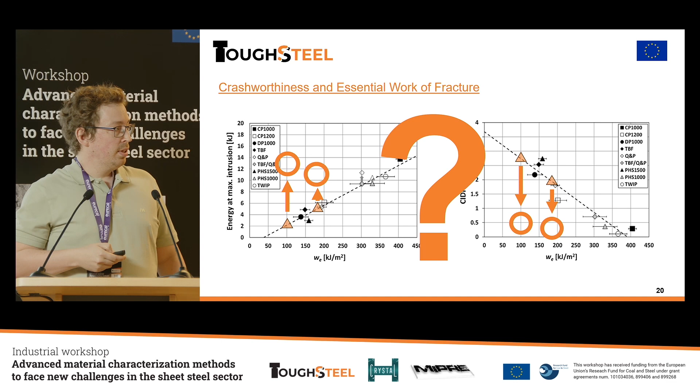So I decided to investigate that as well, using the essential work of fracture at high speed. It's been done by Golling before, but I tried to do it for one of the materials here. I just tested the TBF material. The crosshead speed is 0.5 meter per second, and it can be compared with the published results tested with 1 millimeter per minute. So this is 30,000 times faster. But otherwise, the methodology is the same.

It's been described by Laura before, so I won't go into detail. You do the same methodology, and you receive this. And you can see that the essential work of fracture value there is significantly higher than the 104 that we got from the published paper. And it's something we can see from the published results for another TBF grade as well. It's not the same steel, but the essential work of fracture is significantly higher with increased strain rate. So this makes it very important, for example, if you want to use it in crash modeling, that we take the strain rate into account.

So basically, in summary and conclusion: one great thing with the essential work of fracture methodology is it's simple. We can test it in the lab. It's straightforward. We can reproduce it. And it's geometry independent, so it's really great if you want to compare crashworthiness of materials between researchers at different research institutes. Also, EWF increases with higher strain rate. It means that if EWF should be considered in modeling, the value measured at high strain rate should be considered. So basically, that was what we had.

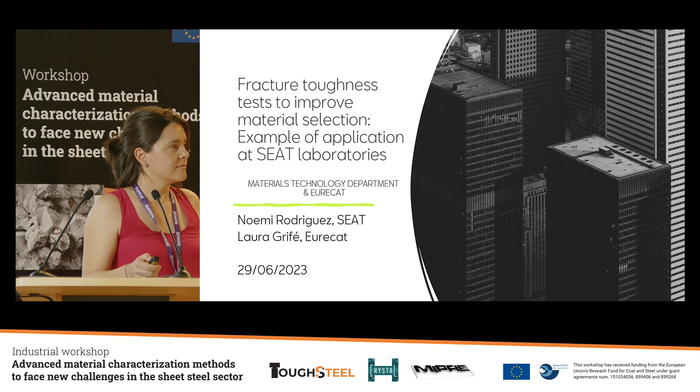As I said, I am responsible for the metallic and corrosion and also electric laboratory in the Materials Technology and Innovation department. This department belongs to corporate quality in SEAT, and we are a group of 22 employees, most of them with chemical degrees and also materials engineering and some electronic engineering.

We have two main groups, one for electric functions, BodyShop and Powertrain, and another for polymers and elastomers. And then we have two cross groups, mainly for innovation and also for technical requirements and new projects. We are the reference of materials for all the companies, SEAT, Cupra, and also for micromobility and new mobility items.

For that, our responsibilities go through all the life cycle of the vehicle, from the concept of the vehicles, in the definition of the materials, new processes related to materials, also in the development, in the launching, assuring that the process and the suppliers have the capability to do all the parts, and also we are present in the serial part. Okay.

As I said, we are responsible for all the brands, SEAT, Cupra, and also micromobility. Our main functions are the feasibility, development, and assurance of the materials and also coatings in all of this cycle. We are also competent in failure analysis, and we are also responsible for corrosion and weathering tests in the whole vehicle in the serial phase.

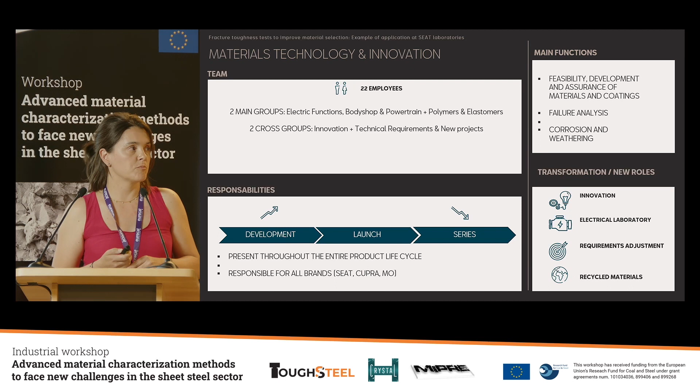Okay, just with this brief introduction, I will go directly to the case study, the analysis of the problem that we had. The part that we were studying is the cross beam, which is used for the dissipation of the crash energy. In this case, this part is from the SEAT Ibiza and Arona. The material used for this part is a dual phase steel due to its high strength and good formability.

And the production people asked us for help because there had been many problems due to cracking. This is an example in the forming process. First of all, in one of the operations during the stamping process, some wrinkles appear in the pieces, and after that, in the next operation, some cracks appear in the edge of the piece.

We know that with this dual phase material, the adjustment of the tool is really relevant. So the first thing we asked our colleagues in production was to take care of the adjustment and maintenance of the tool, and it was done. And they told us that they had found many differences between coils. With the same adjustment of the tool, the behavior was very different from one coil to another. For that reason, we started to analyze the material in our facility in terms of mechanical properties.

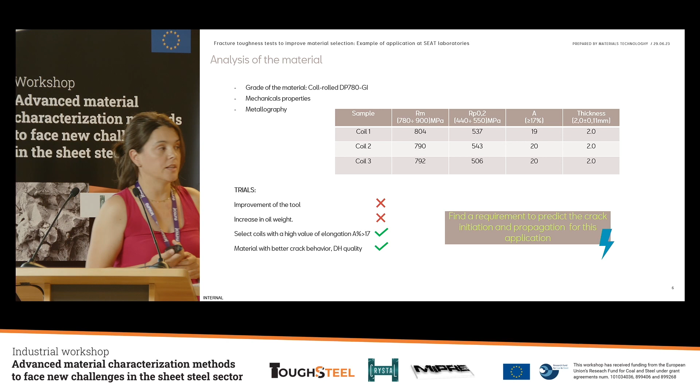Finally, this was the more efficient measurement that is now applied in the serial, but we as a materials department thought, well, okay, now it's solved, but we have to find a little bit more on this and try to analyze. For this, we contacted Eurecat to find some requirement to predict this crack initiation and the fracture toughness, and we knew about this new method, and we tried a kind of study with them. And Laura, if you want.

Thank you, Noemi. So yes, as she said, with this problem that they presented, we wanted to try the essential work of fracture method, but we wanted also to give them the opportunity to do the tests. Okay, so we decided we wanted to do the essential work of fracture method, which is a simple mathematical method. However, the specimen preparation is quite difficult because we need to propagate cracks, and this takes time, and it's complicated to control all these parameters.

Then what we proposed them was to use a new tool that we have developed here in Eurecat, which is a method to create sharp notches in a specimen in just a few moments. Okay. One critical aspect to measure fracture toughness is the radius of the crack tip. So it needs to be very small so that it doesn't depend on the radius of this crack tip. So with this method, we can perform this fast and reliable method to measure fracture toughness.

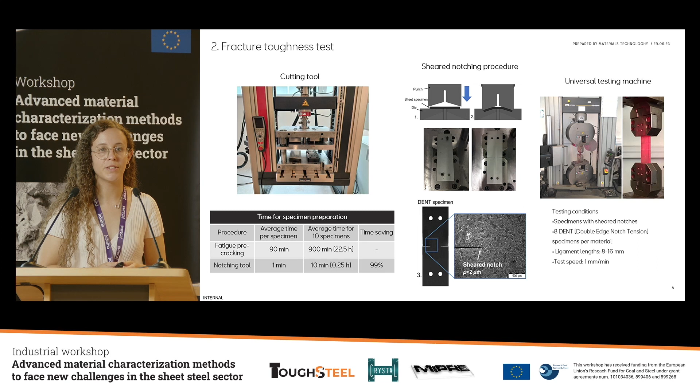Then with all the experimental part, we gave the tool to SEAT. They installed it in their facilities, so they started testing all the materials. With this, they tested 11 coils of material, which was quite a lot of material, so it was not possible to do it with the fatigue pre-cracks and get fast results. So it needed something to be implementable to the industry.

Also, what we could find is that some DPs, for example, had good fracture toughness values, so maybe these ones could be used to fabricate the pieces without any cracking problems, and it would be a good way to choose between the DP materials the best ones to use in the process.

We also compared the mechanical properties of all these coils with the essential work of fracture, and we could see, for example, for the maximum resistance, that the values were similar for all of them. However, the essential work of fracture was better for usually the DH materials. In the elongation, for example, we could find that better elongation for the materials did not always mean that the essential work of fracture was better too. So it was a parameter that should be taken with care.

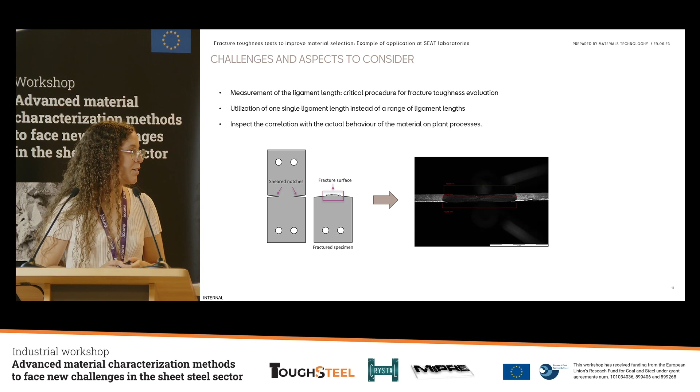We also found that using only one single ligament length instead of a range of ligament lengths can be a good option for fast material classification in the industry. And also we need to inspect better the correlation with the actual behavior of this material in real production. So these are new challenges that we can face with this project. So I leave it to Noemi for the final conclusions.

Yeah, just the final conclusions for this study. We knew that the DH quality has better behavior in production, and we have found that with the fracture toughness the results are also better. But with DP grades, we see that some coils also exhibit good behavior and good results in fracture toughness. So maybe this value is a good option to have in the specification in order to sort and avoid these kinds of problems.

And we have also seen that this method, as Laura said, is a good method to install in the production line. We have experienced that it is an easy way to analyze in just a few minutes, and it's not necessary to have high knowledge in materials technology, for example.

And the next step: we regularly have a meeting in the concern, with Audi, Skoda, and different Volkswagen plants. We are going to present the results there because we think it is very interesting, and we want to push in the group to analyze this behavior better and try to introduce it in our VW standards, and study the possibility to incorporate this method in the standards of the group. And that's it for our side.